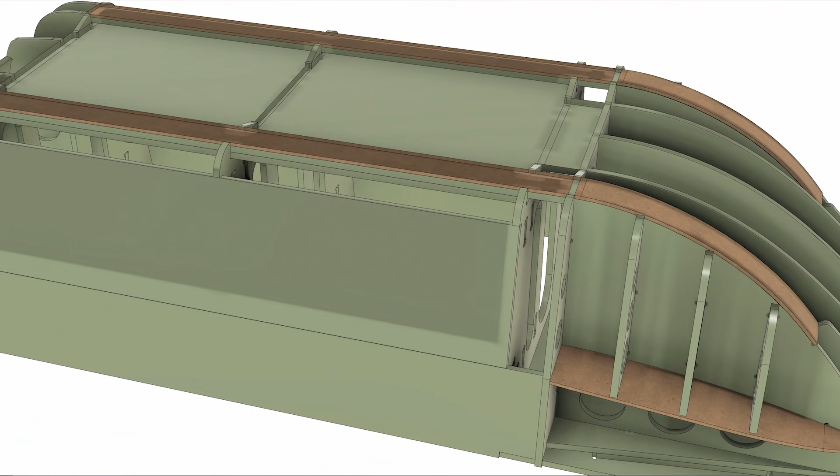We started this journey by speaking to the expedition coordinator, Alex Hibbert, to find out exactly what he needed from these sledges. With that information, we were able to do the initial design and produce the pattern. We then went on to make the mould from that pattern, and then we did some rigorous material testing to establish the best materials that we could make these shells from. And then finally, in this video, we're going to be going on to do the resin infusion itself.

So we'll be preparing the mould, applying a gel coat onto the mould, and then we're going to cut and prepare the materials - that's the Kevlar and the core materials - before setting up the vacuum stack for a perfect resin infusion. So we're going to start off by preparing that mould.

As with all composites projects, we need to start with the release agent, which is a chemical coating that will stop the resin of the part adhering to the mould. In this case, we're applying 6 coats of Easy-Lease release agent. You will see us using this release agent in most of our other videos.

The application method is to wipe a thin film systematically over the surface. On a new mould like this, 6 coats will be applied. After this, only 1 coat between releases is required.

If you're going to be spraying a gel coat, the mould flange will need to be masked using a flash release tape to keep it clean from any overspray.

With the mould now fully prepared, we're ready to put down the gel coat, so we'll just take this now through to the booth. The gel coat we're using is our GC50 epoxy compatible polyester gel coat.

This is specifically designed for use with an epoxy backing resin. Normal polyester gel coats can only be used if you're using a polyester or vinyl ester resin for the main infusion. The GC50 can be used clear, but in this case we want the part to be black, so a polyester pigment is added to the gel coat at 5%.

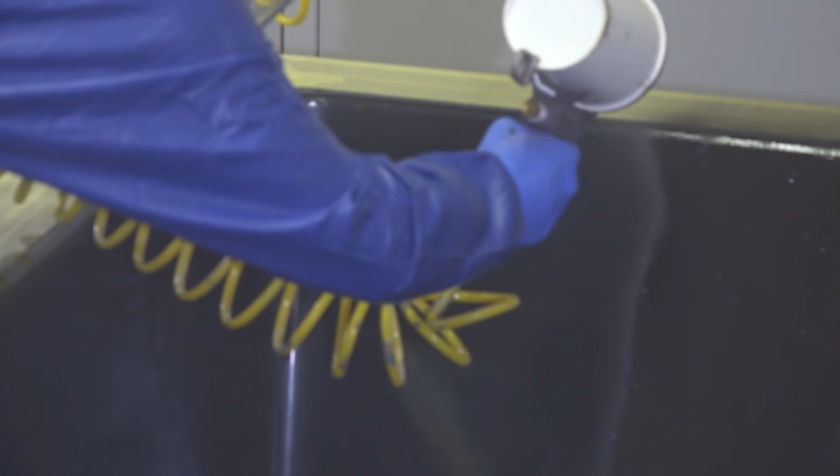You may notice that there is an obvious problem with my process here - I'm spraying a black gel coat onto a black mould. When I made the moulds, the sledges were going to be yellow, however, a last minute change in sponsorship arrangements left me spraying these almost blind.

However, with a methodical approach and careful inspection, spraying a consistent coat is still perfectly possible. The gel coat has now been left to fully cure.

Now when it does cure, it cures without any surface tack at all, which is unlike a conventional polyester gel coat. This is part of its function and allows the epoxy resin backing to fully bond to the surface. I will stress that if you were to use a conventional polyester gel coat, you can't back that up with an epoxy resin.

So if we move on now to the materials themselves, we're going to start by looking at core materials. Now we'll be adding a 3mm core in the flat areas of the part, and this will give us additional stiffness without adding excessive weight.

The core material itself is 3D core. This is a PET foam core and it has a hexagonal pattern embossed through the surface. This will allow the resin flow to flow through the core material and fully impregnate the reinforcement behind. To prepare it, it's simply a case of cutting it to shape with a straight edge and a knife.

The edges of the core material should be chamfered. This tapered edge will allow the layers of fabric to follow the edge without any sharp changes in direction and without leaving a bridge void that could lead to an inconsistent infusion.

3D core is manufactured in relatively small sheets, but joining them together is a simple process of breaking out the hexagons and nesting them together. This has no significant influence on either the infusion process or the structural properties of the part.

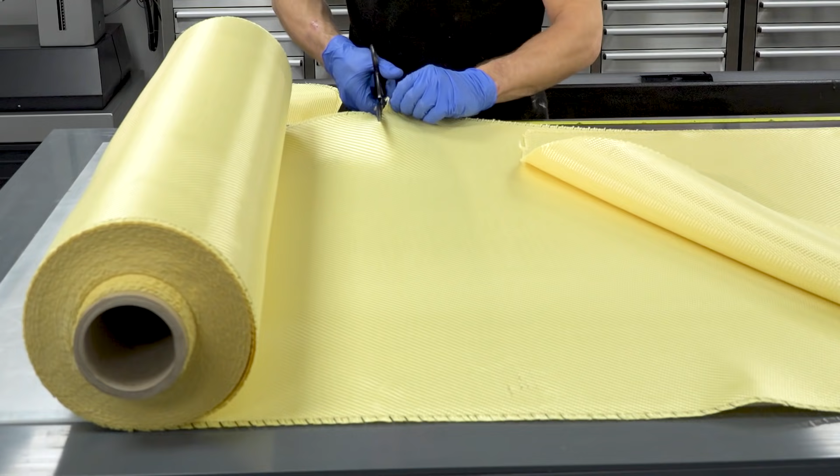Pulling a tow from the fabric gives me a quick guideline to follow with the shears. To cut Kevlar, you really have no option other than to use dedicated Kevlar shears. Conventional scissors will bind and only make very slow progress. Our Kevlar shears have a specific grinding that makes cutting Kevlar possible. If you invest in Kevlar shears, reserve them only for Kevlar, as the more abrasive carbon and glass reinforcements will dull them very quickly.

I'm going to begin the layout by positioning the first layer of reinforcement. That's simply a case of rolling it out over the surface of the mould and getting an approximate position. With the first ply loosely positioned, I can peel this back and use the Fusion Fix spray adhesive to secure it tightly in place. I'm able to do that directly onto the surface of the mould because we've got a pigmented gel coat. If you were working on a cosmetic carbon part with a clear or no gel at all, I wouldn't advise using the Fusion Fix spray adhesive, as it can lead to slight milkiness and imperfections on the surface. After the first ply, on subsequent backing plies, you can use it as long as you're using it lightly, and it won't cause any problems.

When you lay the reinforcement, you need to position it as tightly into the mould as you can. This reduces the possibility of bridging in the corners and ensures consistency in the part. Joins in the reinforcement should overlap to prevent weak points. In this part, we allow a fairly large overlap as we want the additional thickness of the join in the corner. This is where the sledge will receive most of the impacts. The second ply into the mould is simply a repeat of the first.

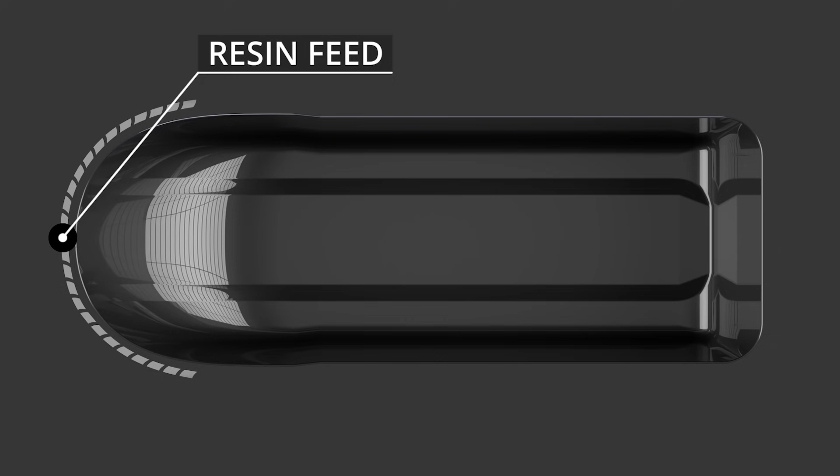Probably the most obvious or intuitive way that most people would think would be to run a spiral down one end of it with a resin feed line, and then over at the far end run the vacuum point. In this case we'd be asking the resin to flow for nearly 3 metres. Now if we did that, that would take probably around 4 hours or so to infuse, which is much longer than the pot life on our resin. So we've got to think of ways to reduce that.

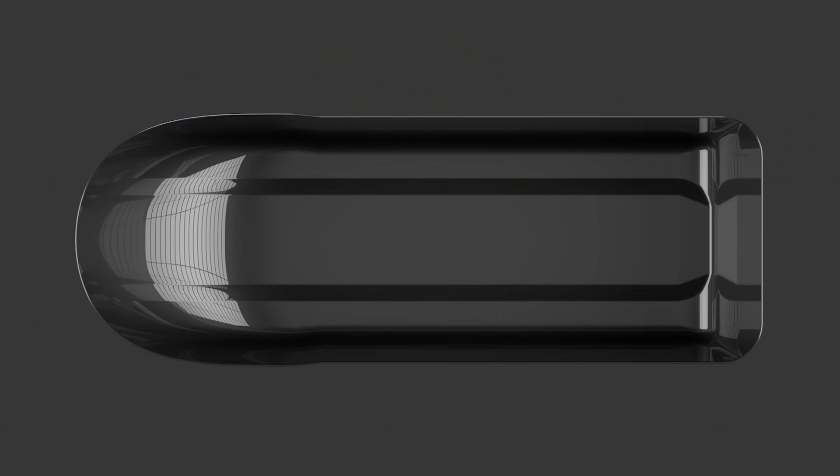The trick is to reduce the distance it needs to flow from the spiral. So we could immediately reduce that by half, which would make it 4 times faster, just by running the spiral down the long side and then allowing the resin to flow across the width. So it's going half the distance, about 1.5 metres, and that'll be probably 4 times quicker. So we might be looking at something like an hour and a half.

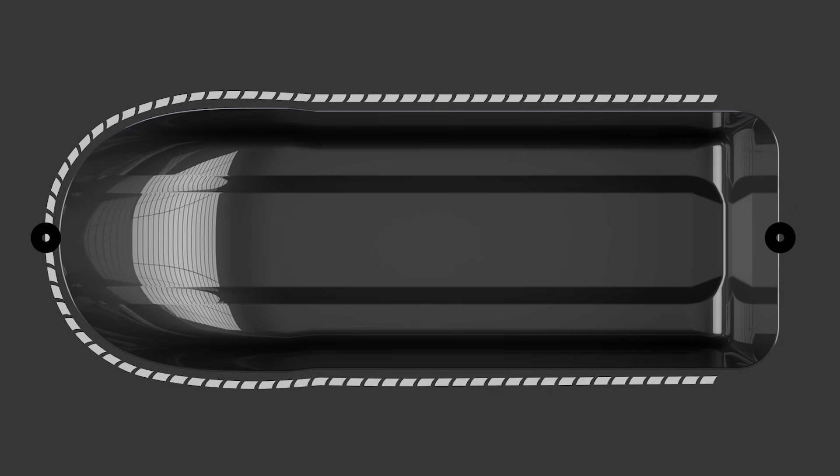So how can we improve that further? Well, if we ran the spiral not only down the side here, but we also ran around in a U shape, right around the perimeter, then we're only asking the resin to flow from the spiral down half of that distance. So now we're 4 times quicker still. At that point, we're probably looking at something like 30 minutes. It depends—the main restriction in that situation is going to start to be the connectors.

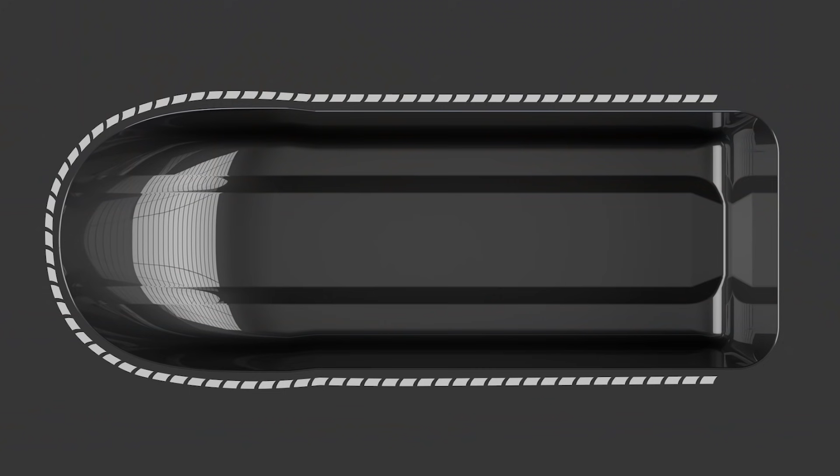We can go even faster still by running additional spirals down the centre, another one here, and then we are only asking it to flow for around 250-300 millimetres. And that's going to start bringing our infusion times down into the minutes. So the main thing you're looking to do is reduce the distance it has to flow from a spiral. A rule of thumb on that is 500 millimetres, so half a metre of flow distance.

If you can keep it under half a metre, your infusion times generally will be very quick.

The next thing is the resin feed lines. If you're doing an infusion that's going to take 10 kilos of resin, this will be the point where you get the most restriction - the small hose that feeds in and the resin feed line. With these particular connectors, normally around 2 kilograms of resin is an appropriate amount to run through each one. So if you had a 10 kilogram resin mix on a very large part, you might need 5 of these.

In the case of this part, I think we're going to need 2 inlets because we're going to be running around 4 kilograms of resin into the part.

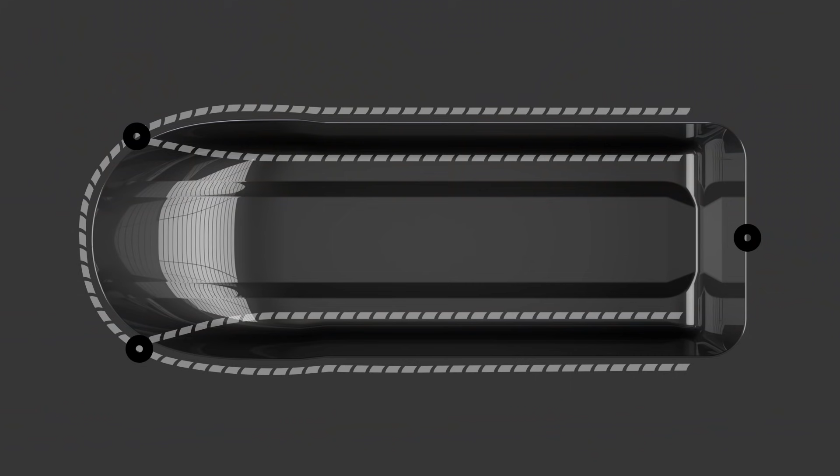When it comes to positioning the vacuum ports, the way to decide where they go is the point which is furthest away from both any resin inlets and the spirals. That way it will converge at that point last, or at least that's the theory. If you've got a complicated shape and can't perfectly work out where that's going to be, put more in. It's no problem to wait for the resin to hit one of these - as soon as it does, you can clamp that one off and use another one. In the case of a Y shape, for instance, you could have 2 vacuum ports in 2 different locations.

One thing worth noting: if you're trying to run the spiral on the surface of the part, on thin cosmetic laminates - predominantly talking about carbon fibre here - the bridging of the bag over the top of the spiral will slightly imprint on the carbon, and you'll get a slight visible line. If it's a very flat panel, you'll see this slight reflection in the carbon, and that would be a cosmetic imperfection. So wherever possible on cosmetic carbon parts, keep the spiral off the edge of the part, which is why for most things you're generally running in this U-shaped format, and you can go quite comfortably up to panels that are 1 metre, or if you stretch the rules a little bit, maybe 1.5 metres wide.

We're just going to secure this in place now using duct tape, and it's important that you position the spiral on top of the mesh. If it's off the mesh, the resin can't flow out of this and into the mesh, so it needs to be sat on top of your mesh all the way around the perimeter.

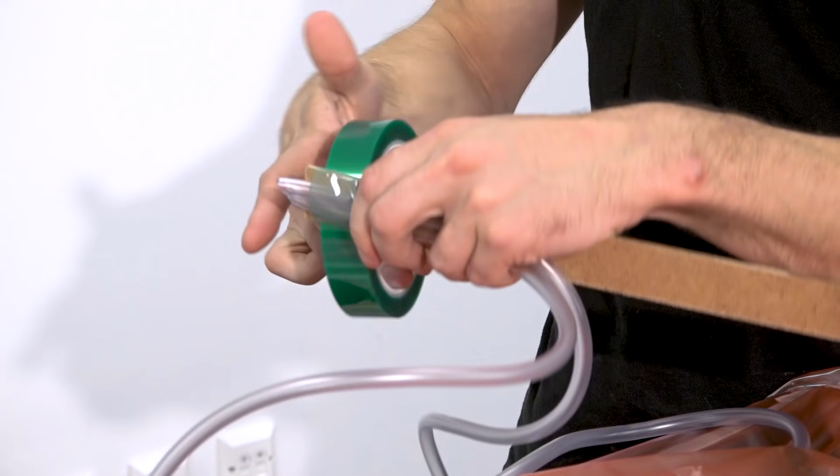We're now at the point that we can pull a vacuum on this. To do that, we've first got to clamp these lines off, because obviously that is compromising the seal. So we clamp the resin inlets.

The vacuum can now be pulled on the bag. This is quite a simple shape, so positioning the bag is quite straightforward. On more complicated shapes, you should gradually increase the vacuum level and position the bag in a few steps. This ensures the bag and material stack conforms as closely as possible to the mould contours. If you notice an area of bridging, drop off the vacuum, reposition and try again.

While the vacuum is pulling down, it's a good opportunity to take a lap around the seal, inspecting it and pressing it down further.

If you're using a leak flow indicator, you're waiting to see this stop moving to show that the bag has been fully pulled down. I've got the vacuum pulled on this bag, and as you can see, the leak flow indicator stopped spinning. That indicates that we've got a well-sealed bag. What it doesn't indicate though is if we've got a perfectly sealed bag, and there's absolutely no point in running a resin infusion unless you know your bag is perfectly sealed.

So to find that out, we're going to do something called a drop test. There are a few different methods of conducting a drop test. The simplest one is to clamp off the line here, just between the catch pot and the pump, wait for 45 minutes to an hour, and see if this gauge noticeably drops at all. If it does, that means you've got a leak.

The method that I'm going to use is a little bit quicker than that. Because we've got a leak flow indicator in the line here, I can clamp the line off as it comes out of the part, wait for 10 minutes, and then remove this clamp. If there has been a slight leak, there will be a surge of air that will run through and make the leak flow indicator spin, and you might also see a flicker on the gauge.

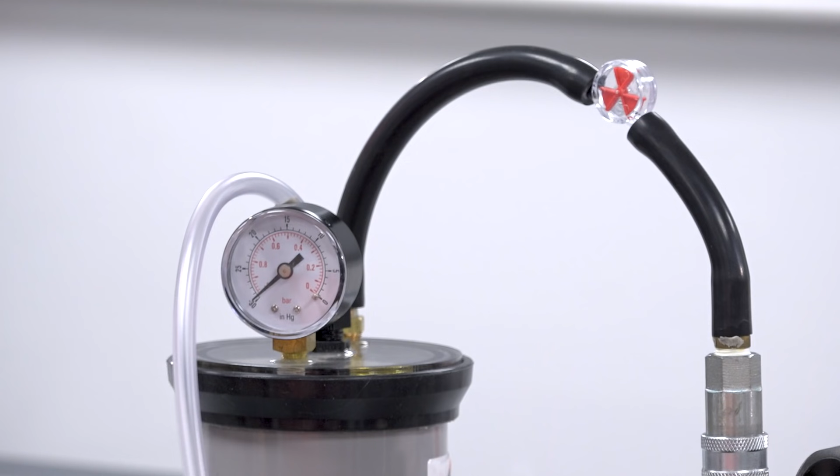Okay, so we're removing the clamp now. After 10 minutes, just crimp that straight. We've got no fluctuation on the indicator, no flicker on the gauge, so I'm completely happy that this is a perfectly sealed bag. It's been a really interesting journey to get to this point.

We started out with a design brief for the sledge, we've gone on to design the sledge and then make the pattern. Then we've made the mould from the pattern, we've done material testing to establish the best materials to make these sledges from. We've laminated all of the material into the mould, we've pulled a vacuum on it, we've done our drop test, and finally we're at the stage where we're ready to do the infusion itself.

So let's get that resin mixed up. Here we are mixing the IN2 epoxy infusion resin accurately and thoroughly to the specified ratio, like you will have seen us do in many other tutorials. In this case, we are mixing the entire amount of resin in one batch, but for larger or slower infusions, using multiple batches as the infusion progresses can help ensure you don't run out of pot life. Here I'm using the double pot method, pouring the mixed batch into a second bucket and mixing again. This ensures you will not have any unmixed resin trapped in the sides and bottom of the bucket. With the resin mixed, it's left to stand for a minute for the worst of the bubbles to escape, and the feed lines are then secured into the bucket with tape.

So we've got absolutely no air in this side of the bag. There is, however, air in these lines here. So what I'm going to do is just gently open the line, allow it to draw the resin through to this point, and then the air that's there, I'll wait for another minute or so for that to get drawn away. This just saves us whisking the first bit of resin with the air that's in these lines. You can see there, it hits the stop of that, because you don't need to unclamp it all of the way. We'll do the same on this side, so just slacken it off. Resin draws through, hits the clamp, and then stops.

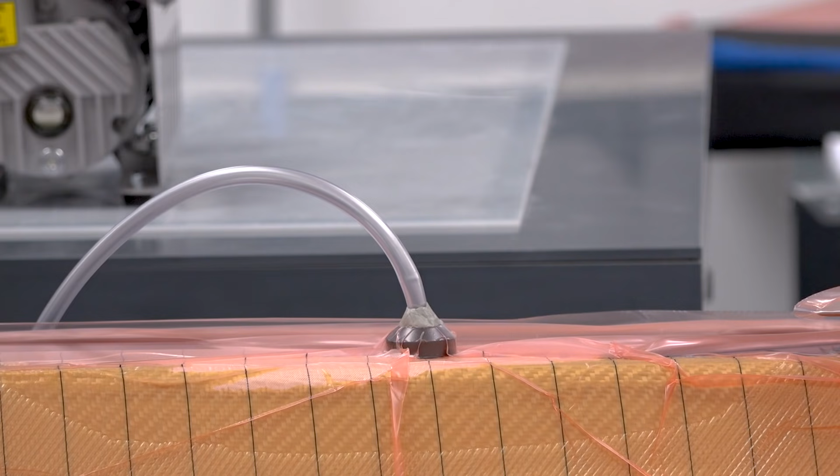With the part fully infused with resin, we can clamp off the vacuum line and switch off the vacuum pump. In this instance, we need to wait a few minutes longer for the correct amount of resin to be consumed by the part before clamping off the feed lines.

This has now been left at room temperature for 48 hours to reach full cure, so we're ready to strip off all of the bagging materials and demould.

A really good indication as to whether the resin is adequately cured for a demould is if you take the resin feed lines full of resin and give them a flex - you should get a clean, crisp crack and break in the resin. If it just flexes, that means your resin is probably not cured far enough, so you might want to leave it a bit longer.

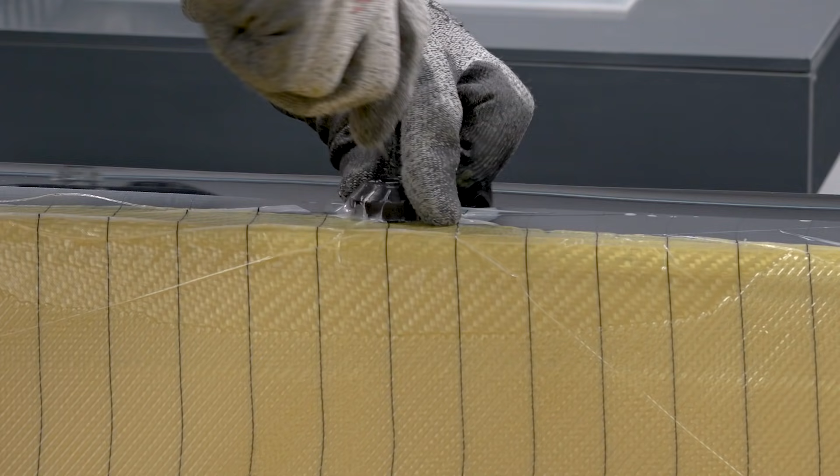Tearing out the peel ply and mesh can be quite tough going, but cutting it into thin strips does make it much easier. Many of you who are familiar with the infusion process will know that a perforated film can be used instead of or behind the peel ply to make the removal much easier. This, however, does come with its slight compromises, which we will cover in a future video.

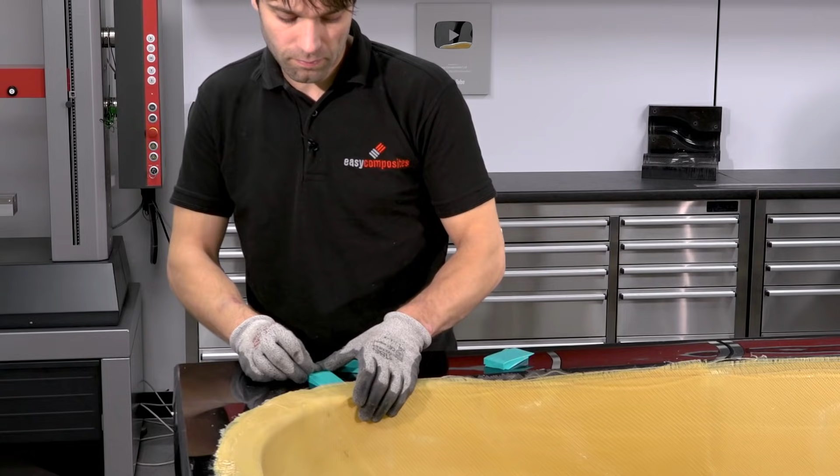Right, so the moment of truth, let's get this sledge out of the mould. Proper mould design and release agent application should mean that the release is very straightforward and should only require very light pressure to break the vacuum seal.

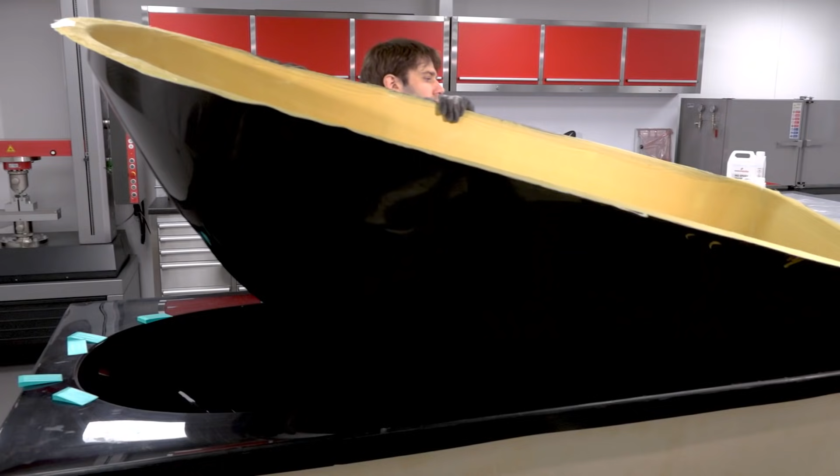So this is the final part out of the mould. I'm really pleased with how it's turned out. All we've got to do now is take it through to the booth, mark it up and trim it, and then it'll be ready to be sent off to be fitted out.

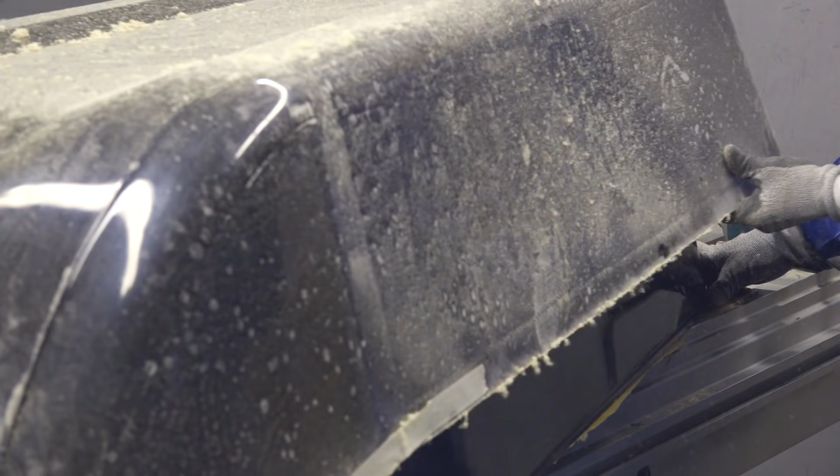Kevlar is not only tough to cut as a dry cloth, but also as a finished laminate. The cut line will invariably fluff up. I find that the easiest way to clean up the trim line is to sand it into shape with a permagrit block, and then remove the fluff with a fine 800 grit wet and dry paper.

So here we have the completed shell. I now need to go on and make another two of these, as there are three members of the expedition team. Then we're going to get this loaded up and run over to the guys at Alpkit, who are going to finish it off with the covering.

These are now back from Alpkit. I'm sure you'll agree that they've really come together with the covers and the decals. They look like the finished product. Alex is on his way down and I'm really excited to see what he thinks of them.

Right, so what do you think of them? I'm pretty pleased with how the end products ended up. Oh, it's looking absolutely brilliant. It's amazing to see it, first of all, on a screen all those months ago, and then suddenly it's the finished product.

Yeah, certainly. And it looks as tough as any of these I've ever seen in my time. I've seen them designed by different people, different parts of the world, but I think this is going to be able to take as much abuse as we can throw at it. Yeah, well, I've got my reputation on the line on this one, but I'm pretty confident that these will be able to take any abuse that the Arctic will have to throw at them.

So where are these going next? So the idea is we're going to be getting this on the ice at the end of this year. So this winter, it'll be going up to hopefully the high Arctic, but if not, just sort of the subarctic regions. And so we can really test it on location and make sure that it ticks all the boxes.

Fantastic. Well, that's the last we're going to be seeing of these sledges, or at least the last I'm going to be seeing of them. I really hope you've enjoyed this video series.